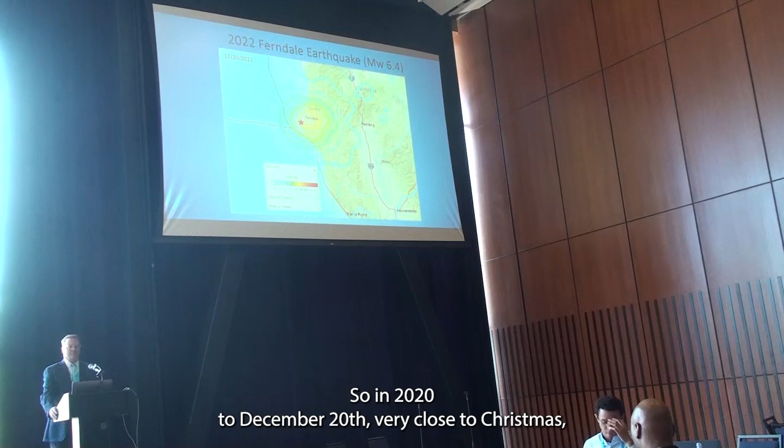In 2022, December 20th, very close to Christmas, we had the Ferndale earthquake with a magnitude of 6.4. You can see here's the epicenter, noted by the red star, about 3 miles off the coast of Ferndale.

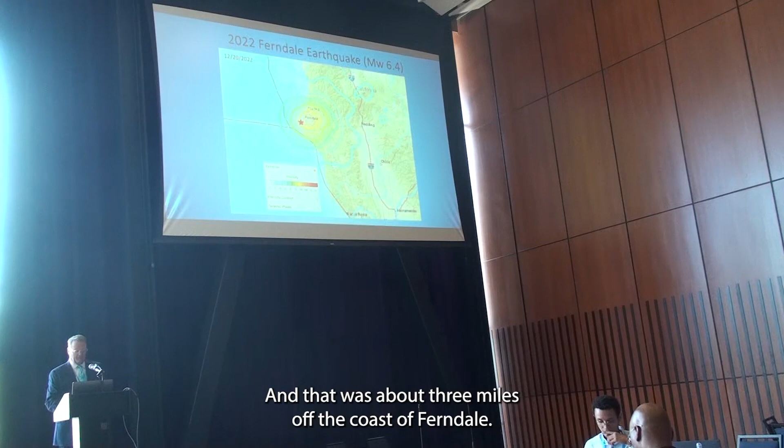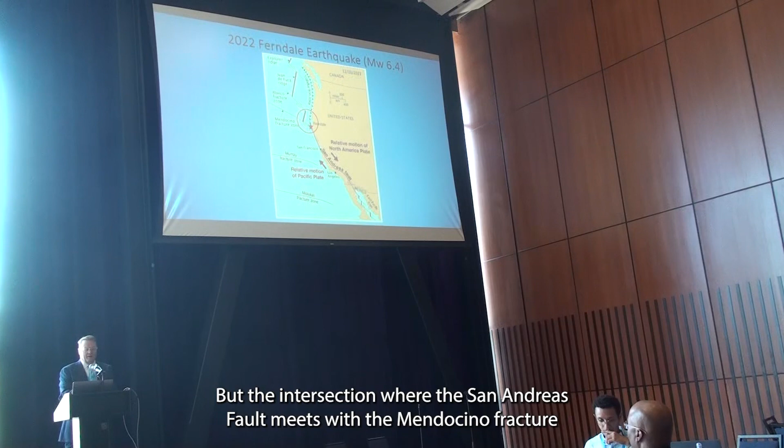As you can see, it's a little more detailed, but the intersection where the San Andreas Fault meets with the Mendocino fracture zone is the area where the epicenter was, and basically where we saw some of the most damage.

I'm going to cover two items here. The first is what we do as a post-earthquake investigation team, and the second is UAS inspections, or what we call drone inspections.

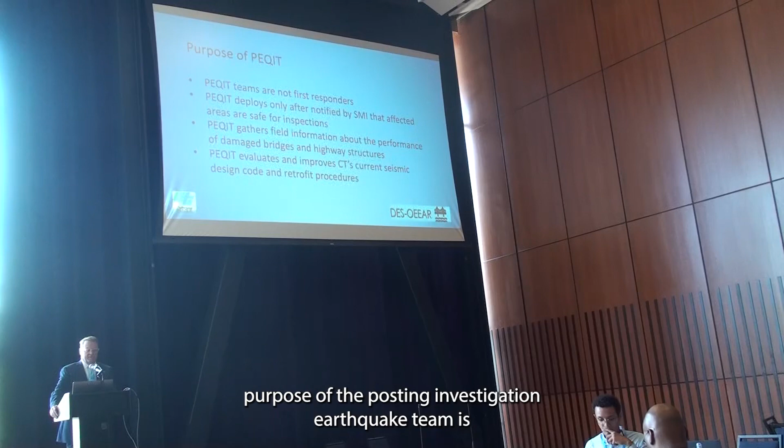So the first thing is the post-earthquake investigation team. This is the purpose of the post-earthquake investigation team: we are not first responders.

We try to get out there as fast as we can because we want to hit the in-situ problems and the damage before construction starts to rebuild, temporary shore, or even remove anything. We want to get there fast so we know what kind of damage we've seen, and so we can take a look with fresh eyes. We have to get there fast, but at the same time, we're not first responders.

We deploy only after notified by the structures maintenance investigations team that affected areas are safe for inspections. That's changed a little bit since we have drones now. We still adhere to this rule, but because we have drones, we can also go in as long as we stay clear and safe of any damaged structures. We can bring the drones in, deploy them, and do our investigations.

PEQIT gathers field information about the performance of damaged bridges and highway structures, and then evaluates and improves Caltrans' current seismic design code and retrofit procedures.

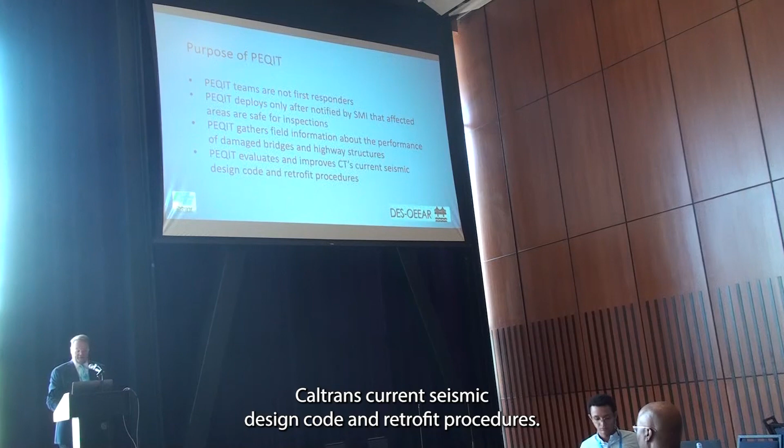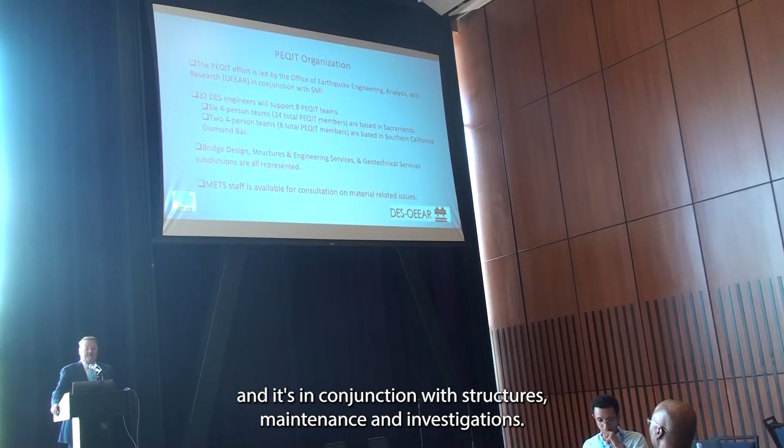The PEQIT organization is led by the Office of Earthquake Engineering Analysis and Research, which I'm part of, in conjunction with Structures Maintenance and Investigations. There are 32 Division of Engineering Service engineers that will support 8 PEQIT teams.

Out of those 8 PEQIT teams, there are 6 four-person teams, totaling 24, based in Sacramento. There are also 2 four-person teams, total of 8, based in Southern California at the Diamond Bar office.

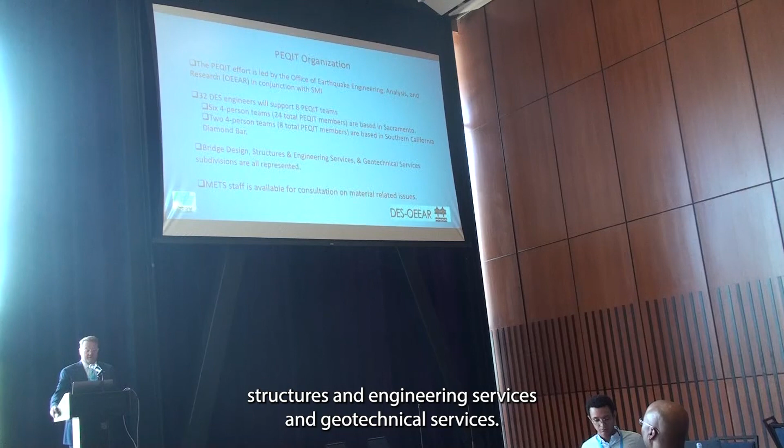These engineers represent all offices or subdivisions within Caltrans, including bridge design, structures and engineering services, and geotechnical services. Also, the materials engineering and testing services lab is available for consultation on material-related issues.

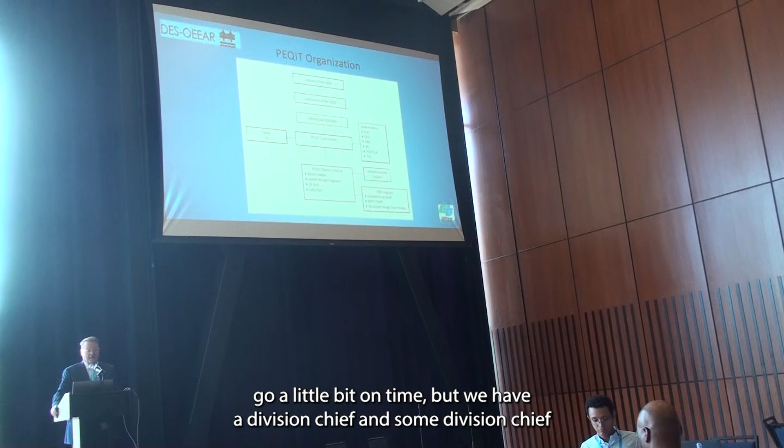This is the organization chart. We have our division chief. I'm not going to go through a lot of names since we need to watch our time, but we have our division chief, subdivision chief, office chief, who I report to, and our PEQIT coordinator, Bob Tanaka, who's actually in the audience.

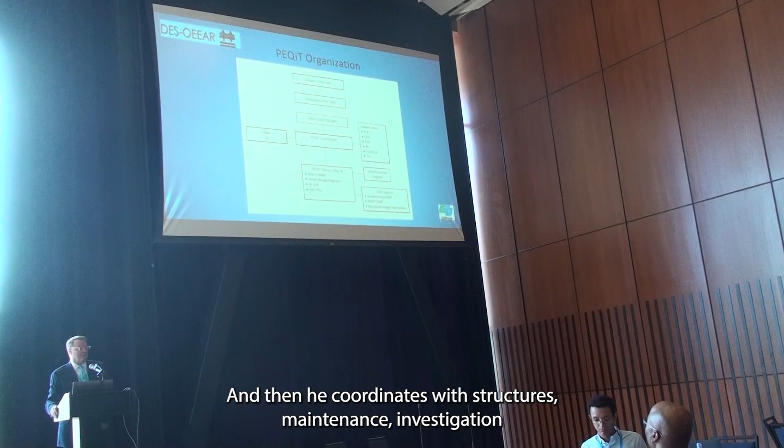He coordinates with structures maintenance investigation and structures construction. There are also stakeholders—different committees, like the Earthquake Committee and Seismic Advisory Board, and so on—who are also stakeholders in our team.

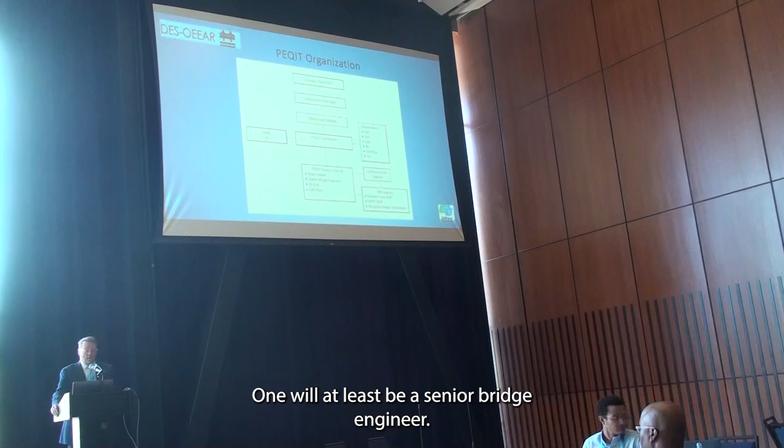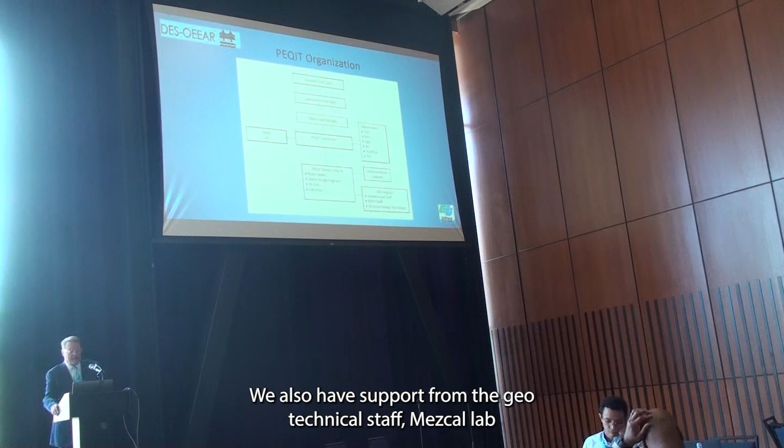Underneath Bob, we have eight teams, 1 through 8. Each team has a team leader, at least a senior bridge engineer. There could be others that are TE civils, ranging A through D. Each team usually includes a UAS pilot, or drone pilot. We also have support from geotechnical staff, METS, the lab, and structures design technicians.

So, what are PEQIT members' duties?

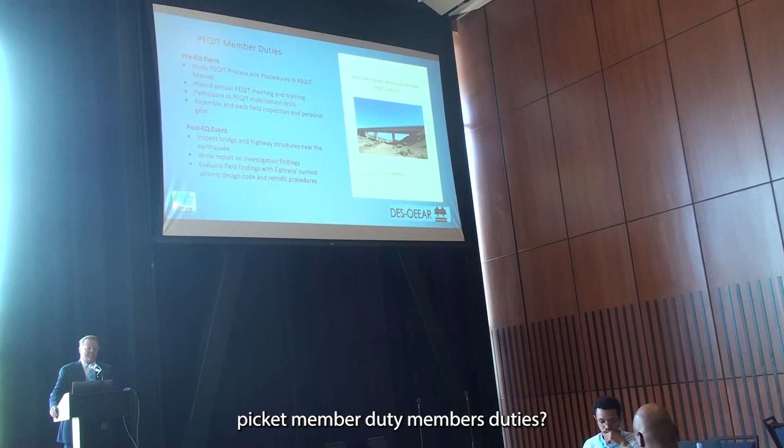Pre-earthquake, we study the PEQIT process and procedures in the PEQIT manual, which has been distributed to everybody. We also attend the annual PEQIT meeting and training, and we participate in PEQIT mobilization drills to stay sharp. We also assemble and pack field inspection and personal gear.

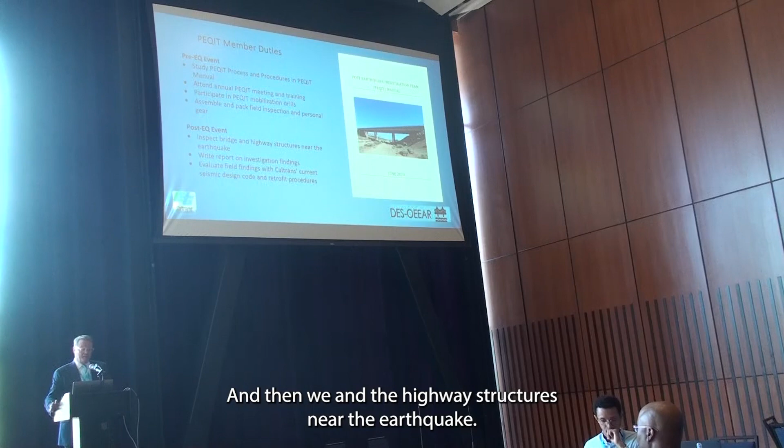After the earthquake, hopefully sooner than later, we go and inspect the bridge and highway structures near the earthquake. We write a report on investigation findings, and then we evaluate field findings with Caltrans' current seismic design code and retrofit procedures.

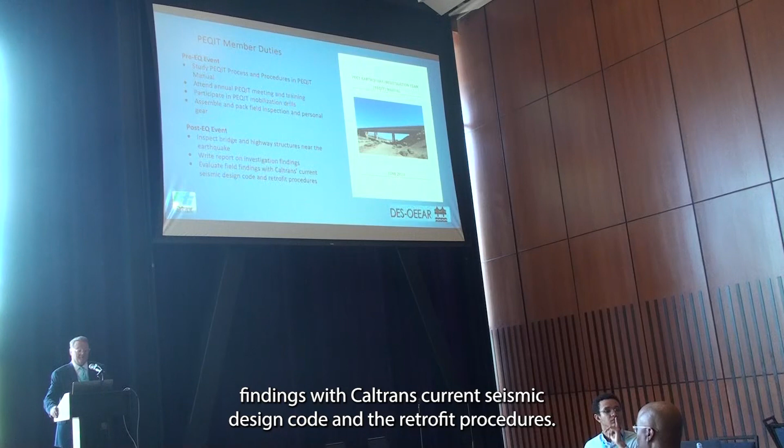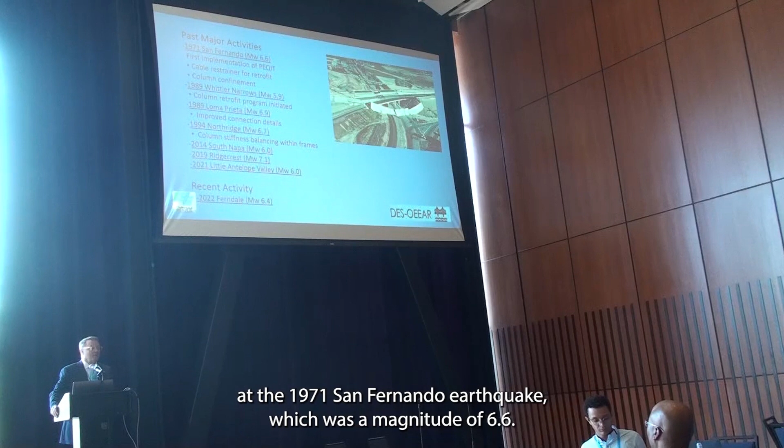So what have we learned? What do we gain from PEQIT? PEQIT is actually 52 years old. We were first formed at the 1971 San Fernando earthquake, magnitude 6.6. Some of you may remember that. We learned from the investigations that we needed to put cable restrainers in for our retrofit program, and we also changed our code for column confinement. So we learned a lot from there.

Then in 1987 at Whittier Narrows, magnitude 5.9, the column retrofit program was initiated. And in 1989, the Loma Prieta earthquake, magnitude 6.9, we improved our connection details.

Then in 1994 with Northridge, we had a magnitude of 6.7. The column stiffness balancing within the frame itself, and then with adjacent frames too, was a real big item that we learned from.

Then in 2014, we had the South Napa earthquake, magnitude 6.0. In 2019, the Ridgecrest earthquake, magnitude 7.1. In 2021, the Little Antelope Valley earthquake, magnitude 6.0. And recently, in 2022, the Ferndale earthquake, magnitude 6.4.

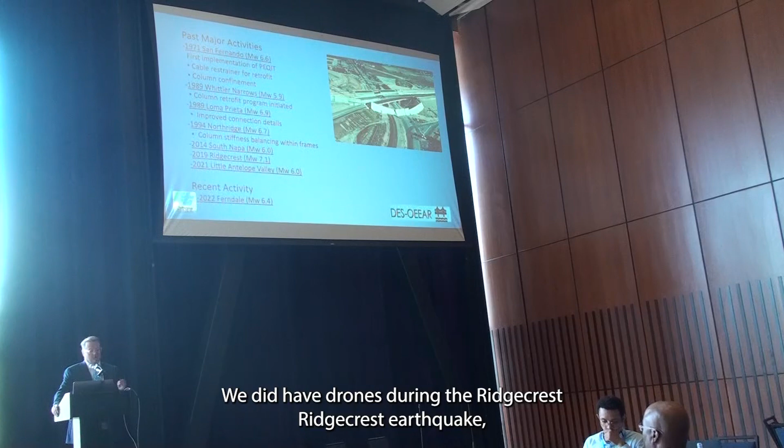The three earthquakes just above the Ferndale one were pretty big, but there wasn't a lot of damage due to being out in rural areas, so we didn't see a ton of damage. We did have drones during the Ridgecrest earthquake, but there was so little damage we didn't even deploy them.

But in the Little Antelope Valley and in Ferndale, we did deploy our UAS team. So now we want to talk a little bit about the drone inspections and what their role is with the PEQIT team.

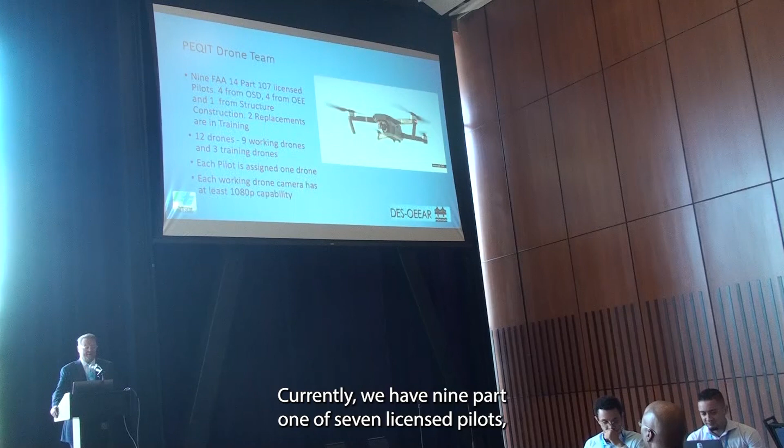Currently we have 9 Part 107 licensed pilots: 4 from Office of Structures Design, 4 from Office of Earthquake Engineering, and 1 from Structures Construction. 2 are replacing right now and are in training. We have 12 drones, all DJI. 9 are working drones and 3 are training drones. Each pilot is assigned 1 drone, and each working drone camera has at least 1080p capability.

You can see here, this is our inventory. Some of you, maybe younger people, don't know these, but you might recognize some. We have 3 DJI Phantom 4s. They're really good, more stable in the wind, and they have the best camera.

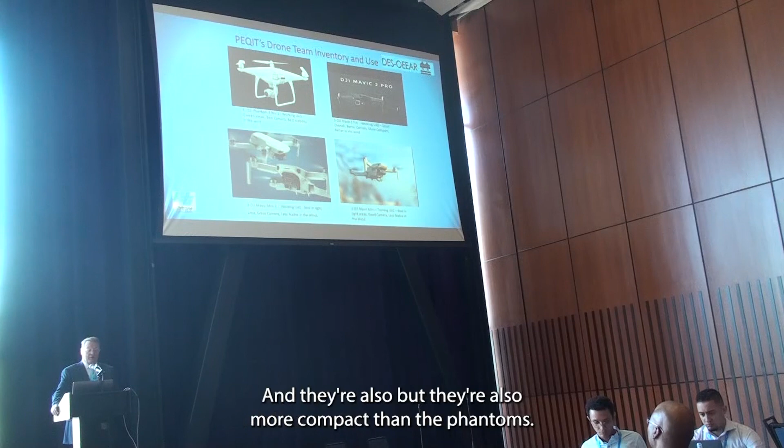And then we have 3 DJI Mavic 2 Pros. They're good working UAS too, overall good, a little more stable in the wind than the lower ones, with a better camera, and they're also more compact than the Phantoms.

And then we have 3 DJI Mavic Mini 2s. They're also good, good in tight areas, though not as stable in the wind, but they do have a great camera. They're also 4K, and those are really good drones.

Then we have 3 DJI Mavic Minis. They're almost the little brother to the Mini 2, but they don't have quite as good a camera. They have 1080p on there.

Now all of this we currently have, but we are replacing them all based on legalities through the FAA and also some policies that have changed internally in Caltrans. So we are going to be replacing all of them with what we call the Skydio 2 Plus. They're about the same size as a Mavic.

If you guys have seen this, we're going to replace those, and we're going to have a kind of a professional kit, and we'll take those out. Those are a little bit, they're really a good drone, and they're quite capable in tight areas.

On December 22nd, 2022, unmanned aircraft systems were first deployed at the Ferndale earthquake. Actually, I get this now. It was December 22nd when we were deployed. The earthquake actually happened on December 20th.

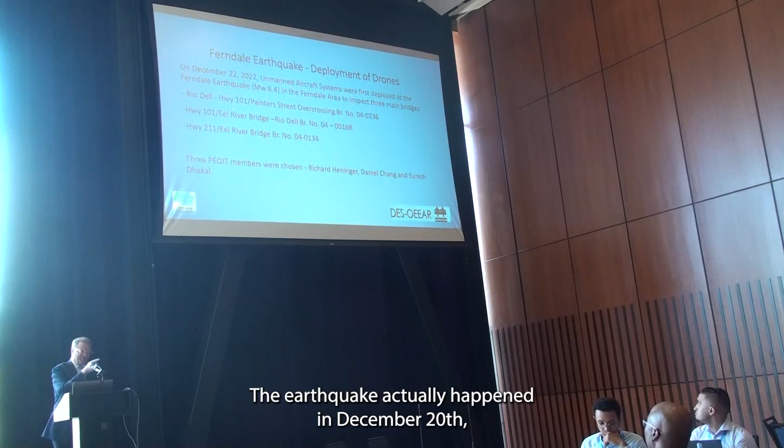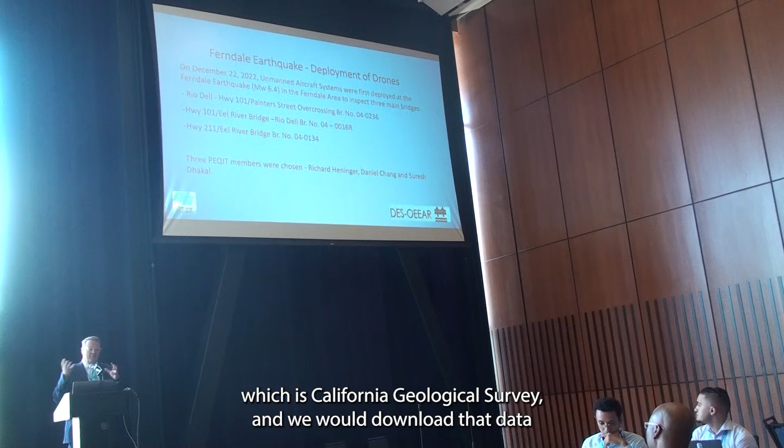Magnitude 6.4 in the Ferndale area, and we basically came down to inspecting 3 bridges. That came from some of the data we'd get from CGS, California Geological Survey. We'd download that data and take a look, we have a program that tells us what potential problems we could be looking for.

So we picked 3 bridges for the day. That day we went down there. The first one we call Rio Dell, it's on Highway 101 over Painter Street. It's the Painter Street overcrossing, and the next 2 are the Eel River bridges.

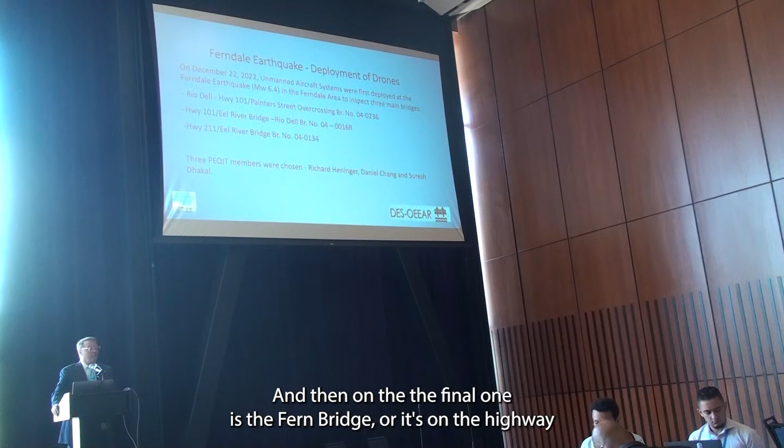There's a lot of Eel River bridges up there, so you have to distinguish them differently. We used to call the first Eel River bridge you see with the 101 the Rio Dell, or the 16R bridge, just to keep things distinguished. The final one is the Fern Bridge, on Highway 211, also on the Eel River, but we call it the Fern Bridge.

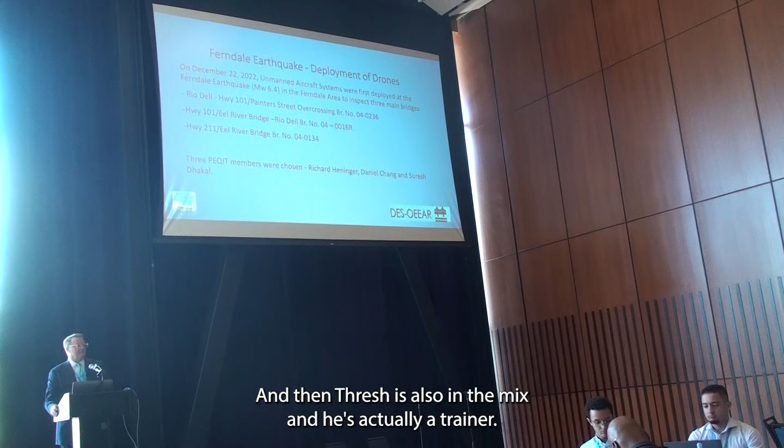3 PEQIT members were chosen. That's me, I was the senior engineer. Daniel is a range D, I think, and then Suresh is also in the mix, and he's actually a trainee, getting trained, so he's in the training mix.

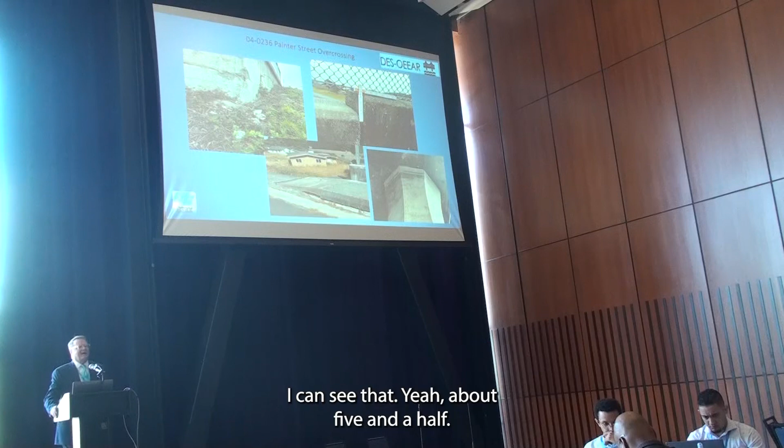There's also some vertical displacement. This shows about from 2 to about 5.5. That's not all from this quake, there was pre-existing movement. So talking with the maintenance engineers, we think it's around 1 inch of displacement.

On the opposite acute corner, you can see there was damage, but also existing damage that was sort of repaired. So there have been problems there, but not all caused by the quake. At Bent 2, we looked at some of the columns and found it doesn't seem like there's a lot of damage there.

A lot of times our policy is to go out and inspect and take pictures, to be the eyes of somebody that wasn't there. Sometimes we like to take pictures and videography of things that didn't have problems, and that's what we're doing here. We're going to fly up this Painter Street column Bent 2 just to see if there's anything we didn't see from below, using the drone. I'll play that for you now.

Now, I was taught, I'm an engineer, I'm not a cameraman, so I was taught to go slow, because if you go fast, you're going to make everybody sick. So I kind of go slow, maybe too slow, but anyway, we'll take a look.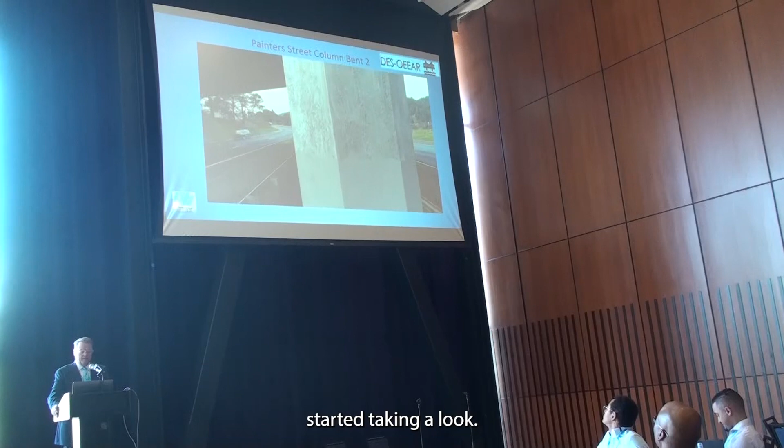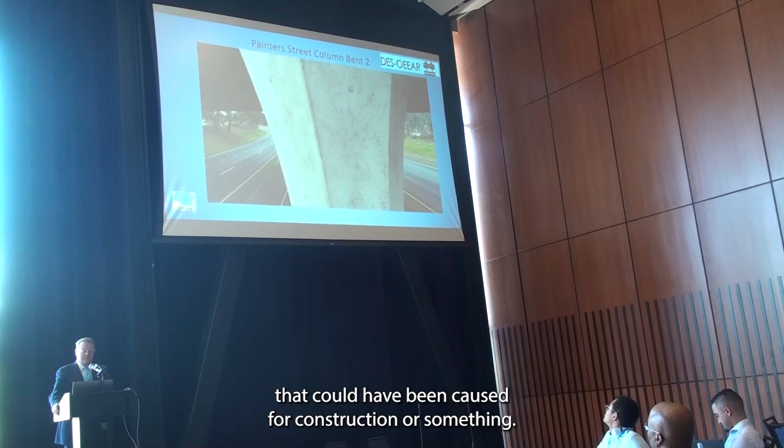So I started moving in, started taking a look. There's a little bit of cracking at the top, but very little, and it's very fine cracks. You can see right there, that looks like a crack that could have been caused from construction or something. There's one right there, and you can kind of see this one. This sort of looks like the cold joint there, so I'm not sure that was a crack at all.

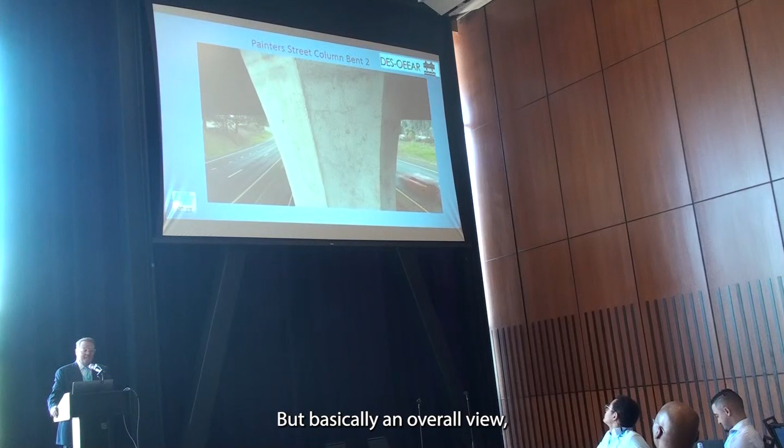But basically, an overall view, we saw that there was very little damage. So it's good to document things that weren't damaged as much as it's good to document things that were. That's our policy.

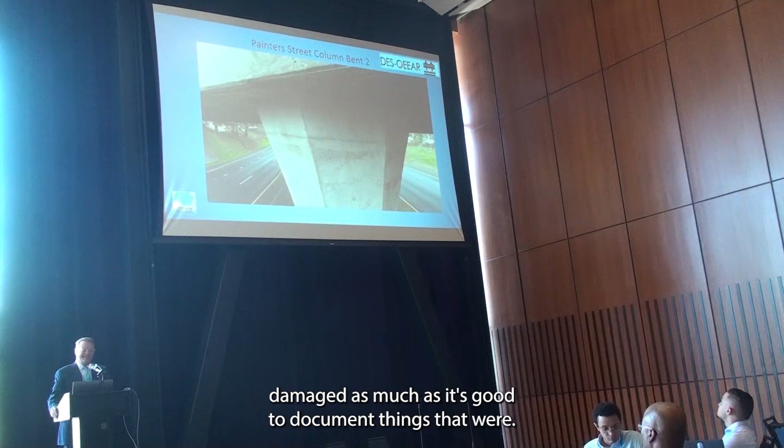Okay, let's just keep going. I'll go to the next one on this one.

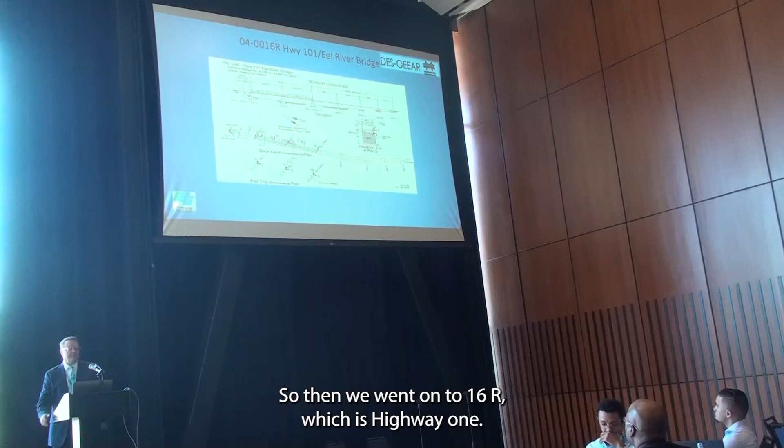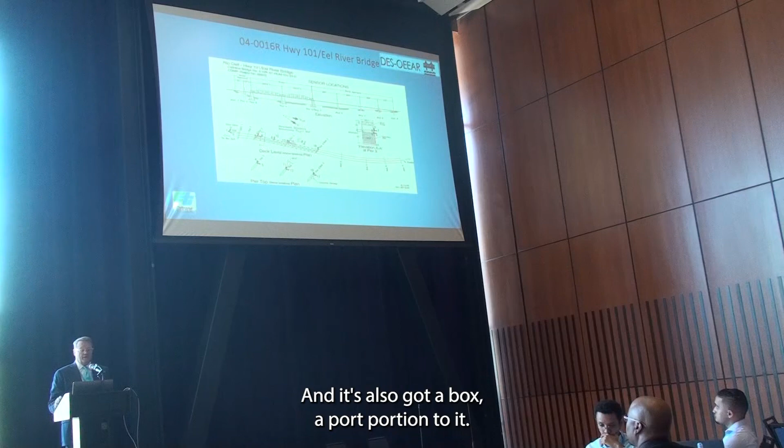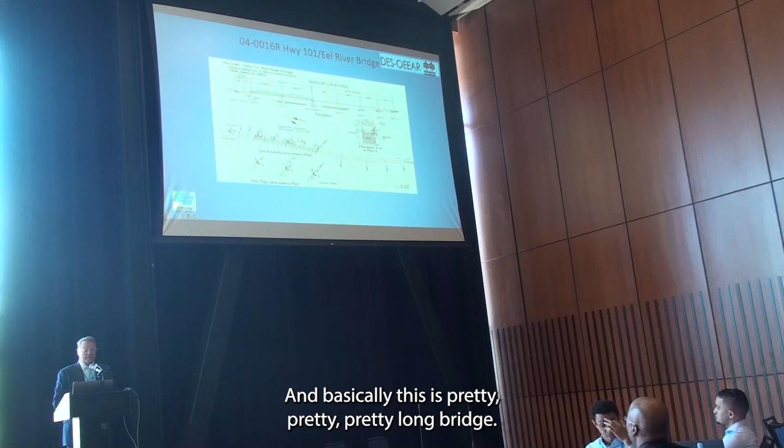So then we went on to 16R, which is Highway 101 Eel River Bridge. This is kind of a conglomerate bridge, a mixture. It's got a truss portion and a box girder portion. As you can see, this is the truss portion and this is the box girder area with single column bents. Basically this is a pretty long bridge.

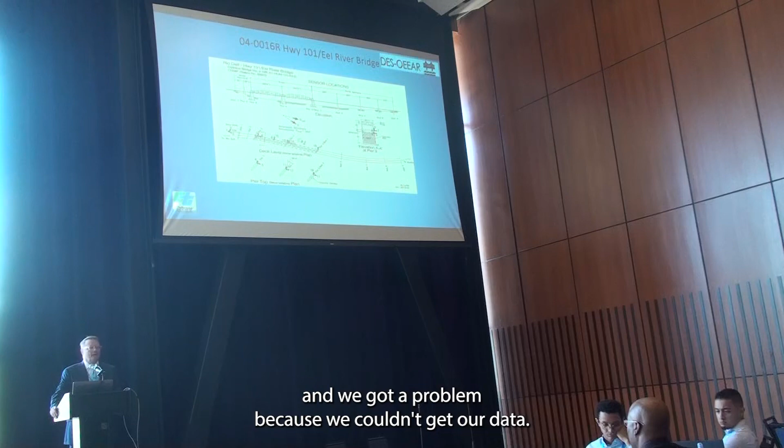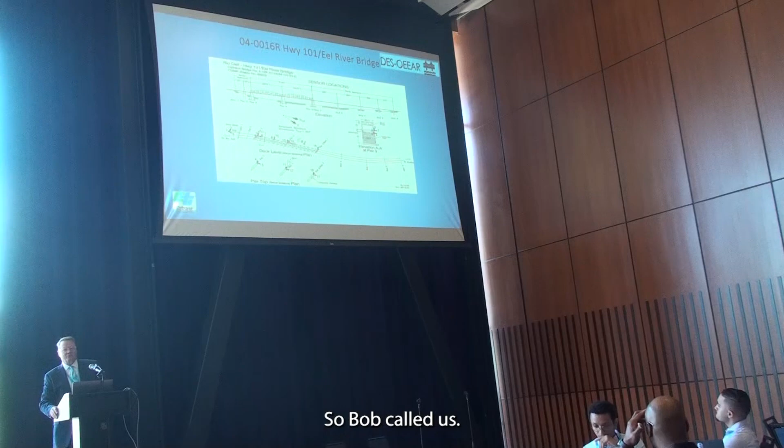Anyway, we were out doing our inspecting and we had a problem because we couldn't get our data. We had poor coverage up there because it's pretty rural. We were trying to connect into CGS's website and we couldn't, so we went to phones. Bob called us and connected with us and said, hey, we just got a call from CGS.

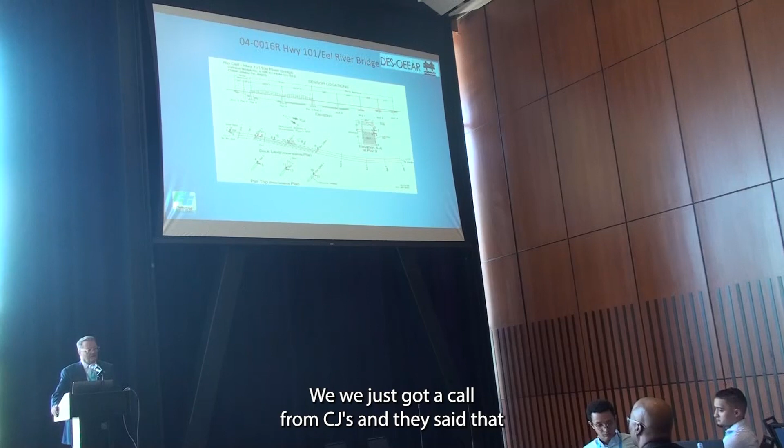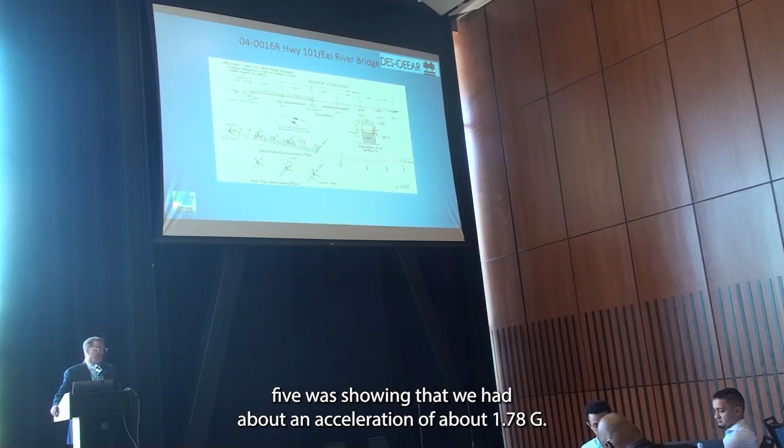They said that you need to go check out Pier 5, because the accelerometer at the top of Pier 5 was showing an acceleration of about 1.78 G. So we were thinking, okay, we've got to go out and check it out. The nice thing was we were real close there.

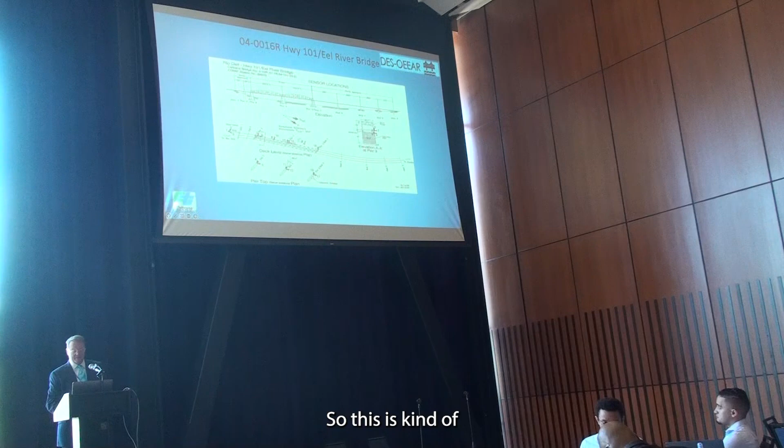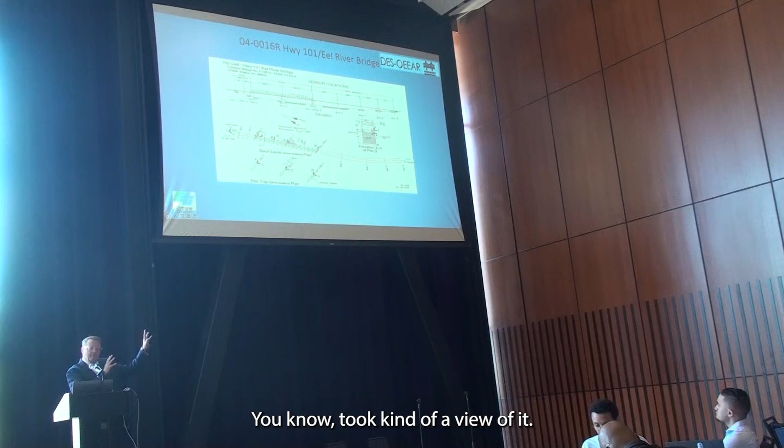So what I did is I took the drone, went to the shore, flew it out about 100 yards and about 100 feet high, and took a picture of it, kind of a view of it. This is an accelerated process of what I showed, just because of time constraints.

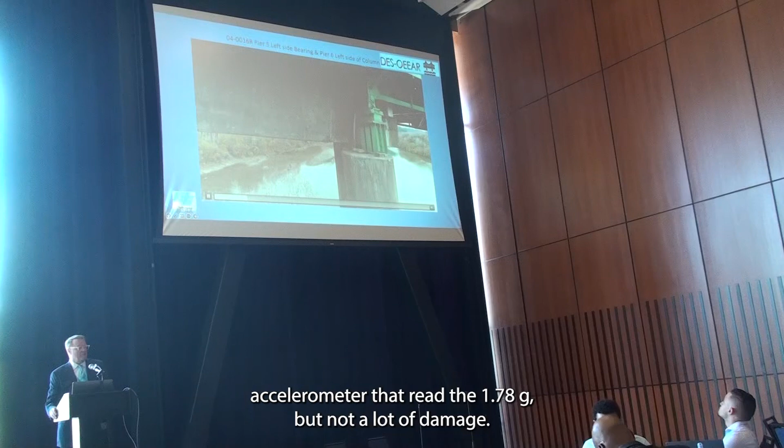Okay, so you can see there's the rocker bearing, then it's on top of a bearing pad, on top of a pedestal. There's the accelerometer that read the 1.78 G, but not a lot of damage, hardly any damage.

I wanted to show that we have these two portions of the bridge that are totally different, the truss portion and the box girder portion. So I'm going to look at the back column to see if there's any damage from there, just because of the differential movement. So I thought, let's just try it.

So we went over there and went in, and this is what we're capturing right now. And we can go in. Again, I go pretty slow. I should have gone a little faster, especially for presentations, but I take my time and go in there to get a good view.

Actually, sometimes I even have problems with birds. They don't really like me up there and they start fighting me, especially if it's a mama bird. I have to kind of weave in and out sometimes. But basically, as you can see, not hardly any damage, so we were good with that one.

Now, that doesn't mean that there wasn't damage. There was damage at this earthquake, so I'll show you some of that, especially on 16R. There's some stuff here.

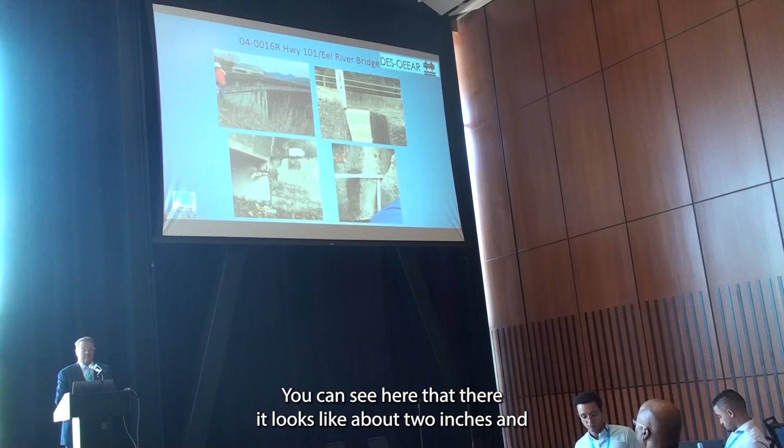This will be the north abutment. Basically, there was some movement, definitely some movement up there. You can see, based on this picture, there was a little bit of vertical movement and also longitudinal movement. You can see here that it looks like about 2 inches, but when I talked to the maintenance engineer again, it was not 2 inches of vertical, it was more like about 1 inch.

And then you can see down in here, on the seat abutment, where the soffit and the superstructure sit on the abutment itself, there's movement due to that white area right there. This is a close-up of that, and it actually did move about 4 inches longitudinally.

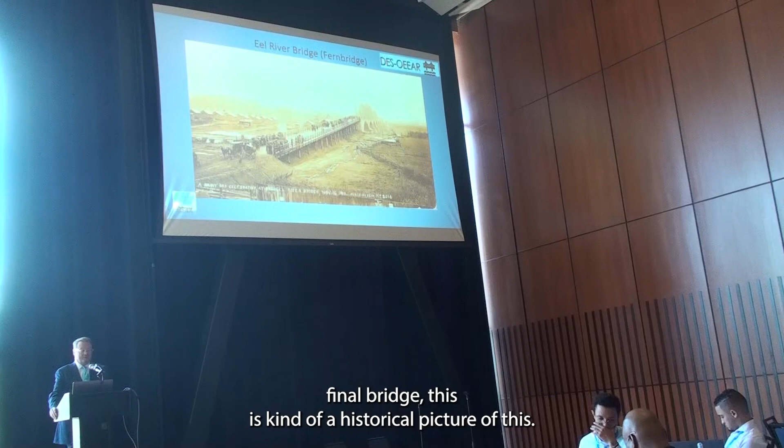Now the final bridge. This is kind of a historical picture of this. This is the Fernbridge, kind of a famous bridge. It had some damage, not a lot, but some. This was built in 1911, as you can see.

This is the approach portion. It has pile extensions, which look like they were timber at the time, now they're concrete. Then you have the arch portion. Those arches are actually hollow.

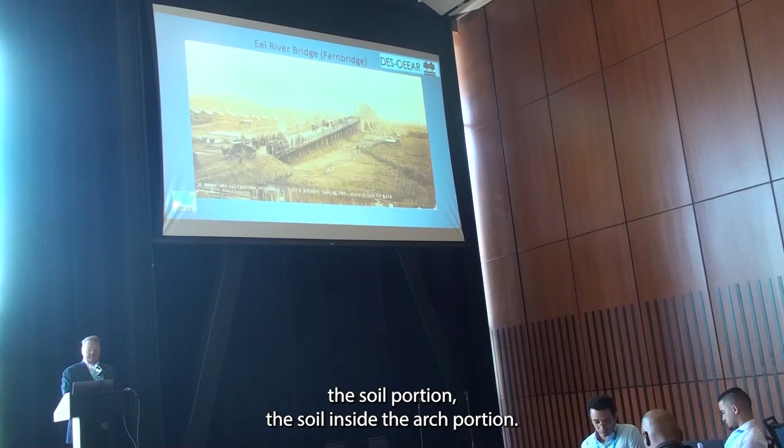So they hollowed them out and then added actual earth in the hollow portion, compacted it down to level, and then they would ride their, I guess, horse and buggy back then, but later cars. Later on, they put a bituminous material on top, but it still basically has the soil portion inside the arch.

So this is kind of what it looks like. There's the approaches, slab approaches with pile extensions, and then there's the arch portion.

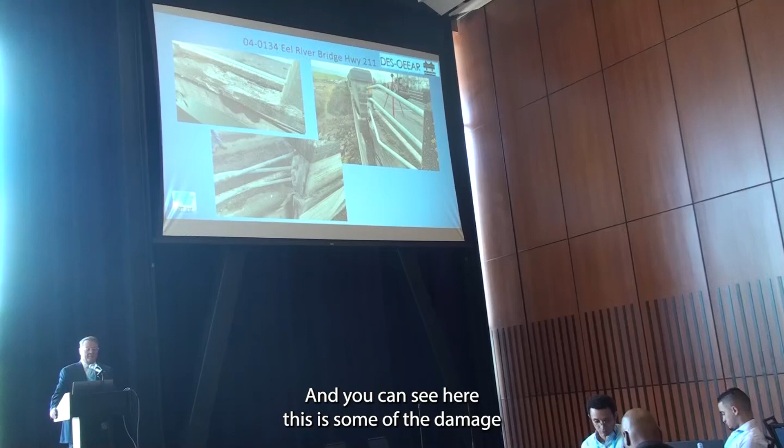And you can see here, this is some of the damage at the south end of the Fernbridge. You can see this edge beam saw some compression, so we have some spalling of the concrete, and then we have some buckling of the rebar.

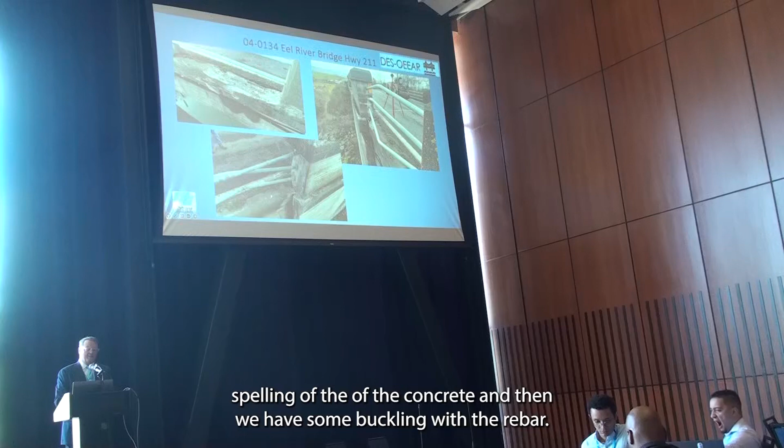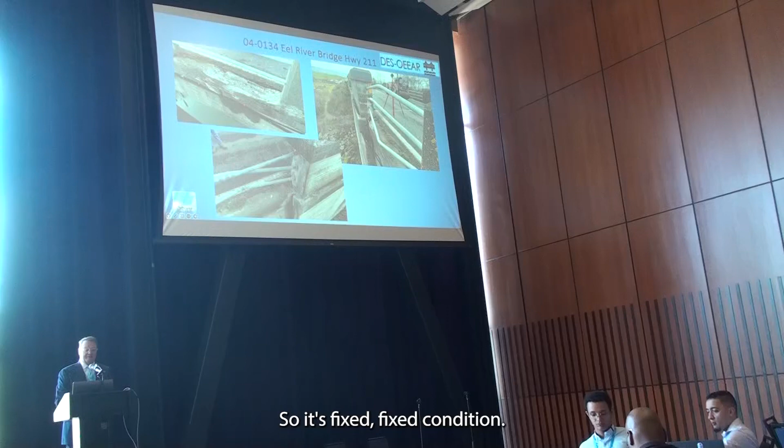And then just above that, we have some railing. That railing is basically old style railing, a fixed condition, and it did buckle due to the longitudinal movement of the bridge. I'll show that a little bit later, just a second, sorry about that.

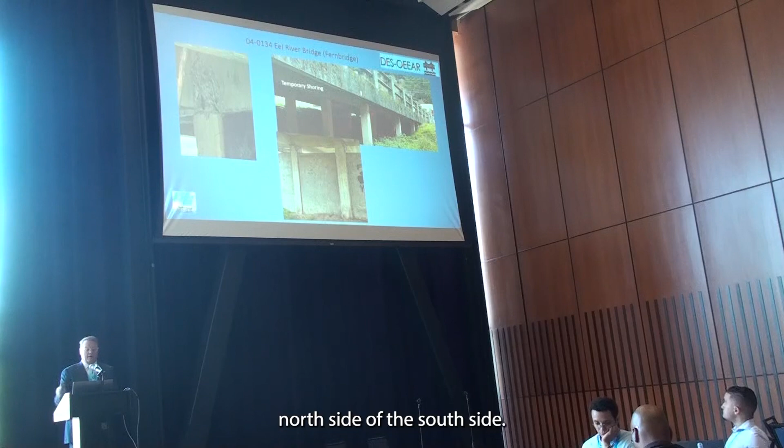Okay, and then this is the north side of the south side. When we got there, we got there about 36 hours after the quake occurred, and we were a little bit late based on seeing any kind of real damage in the portions at the approaches.

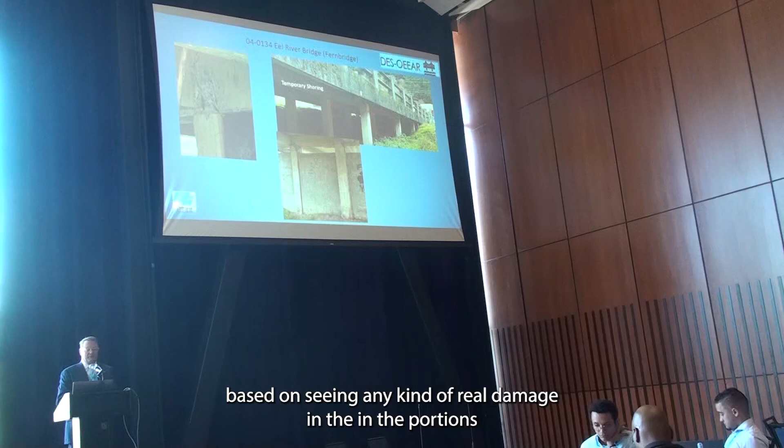of the north side. They'd already installed some temporary shoring. The contractor was out there hauling these timber piles, timber sections already out there for the temporary shoring.

You can also see that there was some spalling on some of the bent caps. There was also some spalling based on these infill walls, lots of stiffness there, and then you can even see there's some existing spall where it was spalling, and then they added concrete. So this is somewhat of an existing condition.

This is the south side again, and you've seen this before in those pictures. I'm just going to show you what we did with the actual video. I have a lot of video on this. I would have loved to have shared it with you, but it takes like 2 hours to explain everything, so I don't have the time. I wish I did and could show you some really cool footage of some of this damage here.

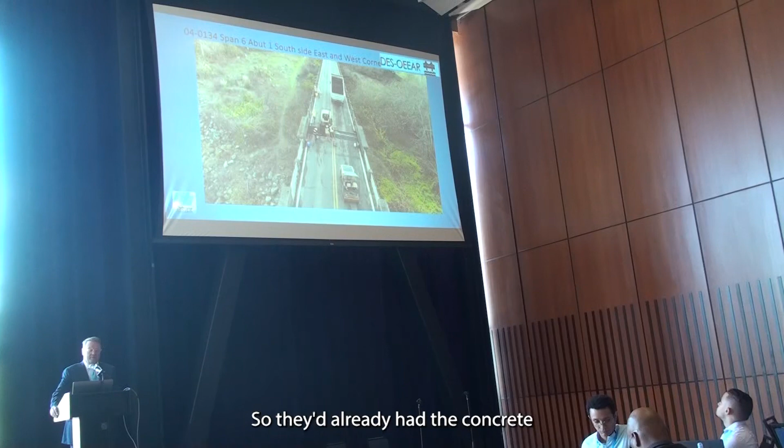Again, this was because of the longitudinal movement. There was buckling at the deck level, and so they were repairing that at the time. They'd already had the contractor out there deployed and already working on fixing the buckling in the deck at the pavement level.

And then this is the other side, and I will turn my drone around and show you a little bit of the damage from the wing wall and the separation of the wing wall from the abutment. The top of the wing wall, the separation was about 1.25 to 1.75 inches, somewhere around there, and at the bottom it was about a quarter inch.

And as you can see, there's also damage there. So there was transverse movement a little bit, and there was a lot of longitudinal movement. So I'm going to finish that.

Okay, so the conclusions from the December 22nd investigation: the shorter columns on the approach spans experienced damage at the Fernbridge, minimal movement and no damage to the rubber isolators at the top of Pier 5 of the Eel River Bridge. The shear keys performed as expected at the Painter Street overcrossing and the Eel Bridge at Rio Dell. The Eel River Bridge at Rio Dell also showed a longitudinal movement of about 4 inches.

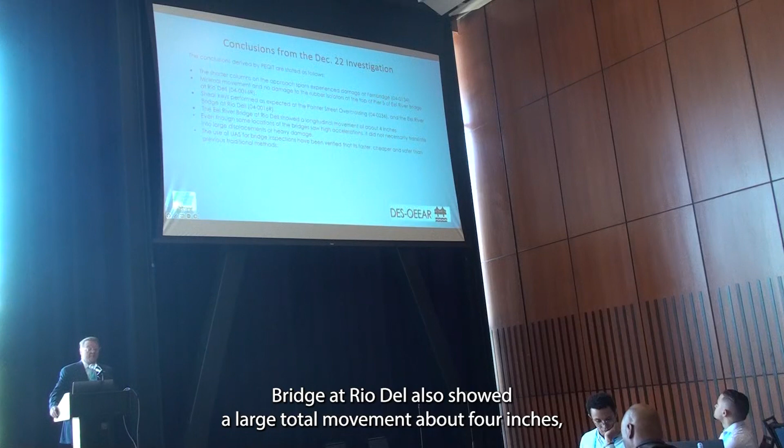Even though some locations of the bridge saw high accelerations, that did not necessarily translate into large displacements or heavy damage, as we saw.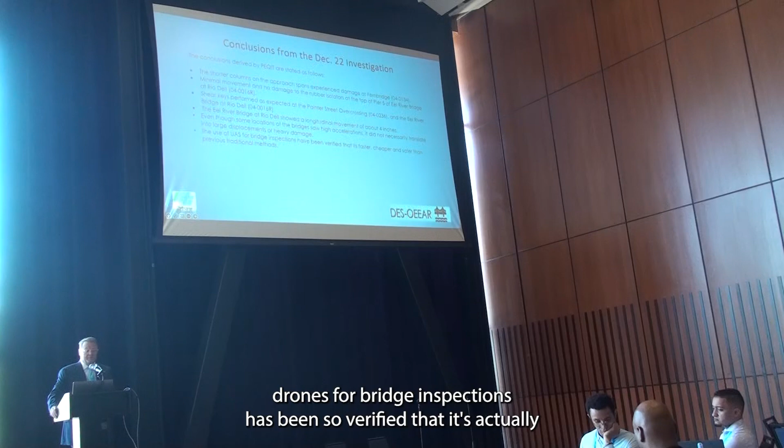The use of UAS drones for bridge inspections has been verified to be actually faster, cheaper, and safer than previous traditional methods. That call from Bob to where I went and flew the drone and took the pictures of that bearing took about 10 minutes. So that's the kind of power you get from inspecting with drones. Thank you.